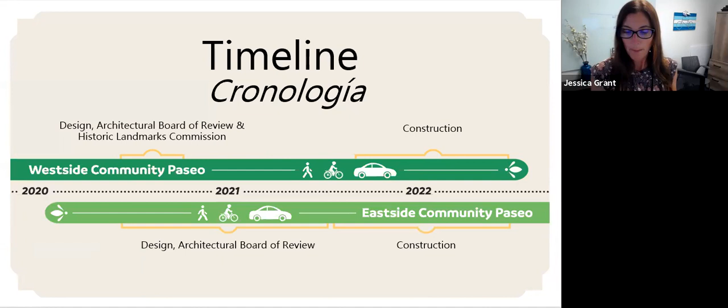Now let's begin at the intersection of Gillespie and Mission. This intersection is the main intersection to get to La Cumbre Junior High and Santa Barbara Community Academy. This intersection is currently at a skew and is not stop controlled along Mission, for pedestrians.

I walked this intersection with a junior high age Girl Scout troop, and one of the girls said this is by far the most difficult intersection during the school commute hours.

In response to the community, this intersection will have an all-way stop. We will also be able to shorten the crossing distance for pedestrians, limiting the time and the right-of-way needed for students and their families. With the intersection configuration, we are also able to better align the street and have much better sight lines. If you are traveling eastbound on Mission, you will not be able to cut through on southbound Gillespie, so Gillespie can be maintained as a slow street. There will be 2 parking spaces removed at Gillespie with this intersection improvement.

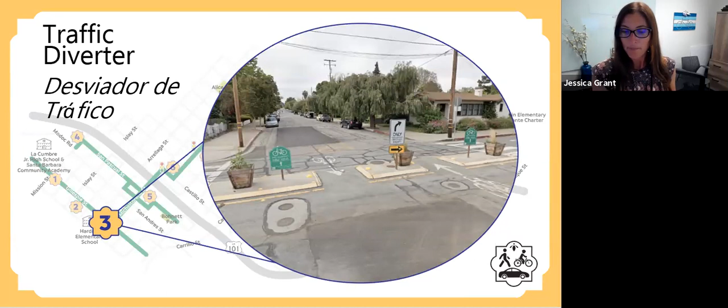There will be a traffic diverter, and this is an image of a traffic diverter in another community. The proposed diverter will have 8-inch curbs and look similar to the one in the photo, with the exception that brick is proposed within the curbs instead of concrete.

Drivers on Gillespie will now only be able to make right turns, to help slow the neighborhood route and limit the amount of vehicles on Gillespie.

In summary, the Gillespie corridor will have enhanced intersections, raised crossings, and traffic diverter features, making it attractive for walking, biking, and driving. Also note that all stop signs will be removed from Gillespie and changed to the perpendicular streets along the whole stretch of the Gillespie corridor. Again, this is to favor the movement of bicyclists.

Also note, we have received some questions on Gillespie about whether there is parking removal. With the exception of the 2 spaces that need to be removed at the Gillespie-Mission intersection, there is no additional parking removed. Please remember to use the chat function if you have any questions so far with what we just covered on Gillespie Street.

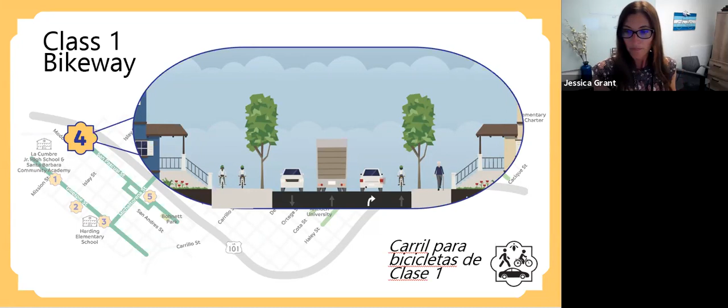Cyclists using this off-street path but wanting to continue on the street southeast of the Mission San Pascual intersection into downtown can hop right onto the on-street bike lane after this connection piece. For cyclists continuing on San Pascual Street, they will exit just before the driveway of Mission Liquor. We anticipate there will be 2 parking spaces removed right at this driveway location.

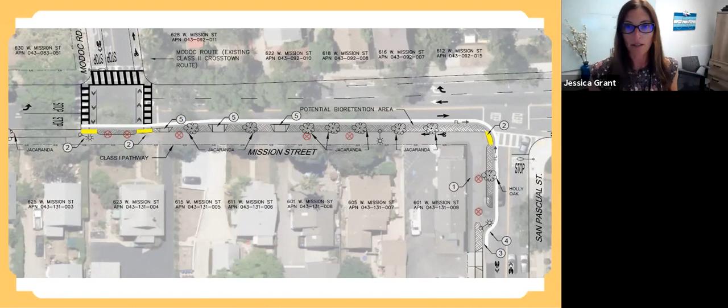So now we're on the San Pascual route. With the exception of one all-way stop controlled intersection at San Pascual and Islay, all stop signs are already on the perpendicular streets to favor the cyclists. Besides being a neighborhood route, we have heard from the community that this route will be very popular for bike commuters. At the end of our presentation, feel free to use the chat function, we will want some resident feedback on whether you think there are additional treatments you may want along this route with respect to slowing the street down.

Now we're at the final piece of the route that we are highlighting tonight. Both of the neighborhood routes connect to Micheltorena Street, and Micheltorena Street is one of the main streets connecting the west side to downtown. The community has wanted a strong bike route along Micheltorena Street over the Micheltorena Bridge into downtown, because this route does not involve navigating freeway on and off ramps like Mission and Carrillo Streets. Despite Micheltorena not having freeway on and off ramps, the street is still very busy for drivers, walkers, and cyclists.

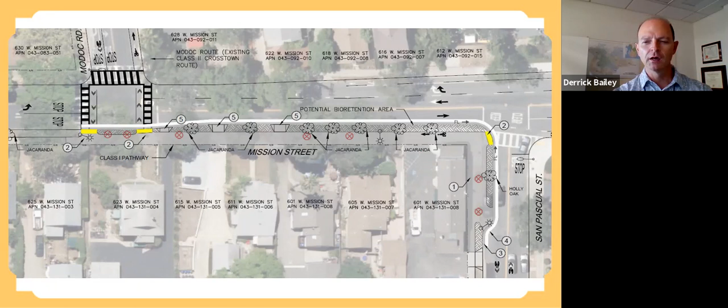We're not quite sure if there will be delineators on Micheltorena or not, and we hope they'll be attractive, not the white posts used on Cota Street. For everyone not familiar, Cota Street coming from the east side has a bike lane against the curb, then a painted buffer about 2 or 3 feet wide, and a vertical plastic delineator separating traffic from the bike lane.

We've received a lot of good feedback from cyclists that they feel safer in that bike lane and appreciate the separation. It takes up space though, to create that buffer for the vertical delineator. That's why we're leaning towards the raised bike lane concept instead of a buffer, but we'd appreciate your feedback. If that would make you as a cyclist feel safer, please let us know.

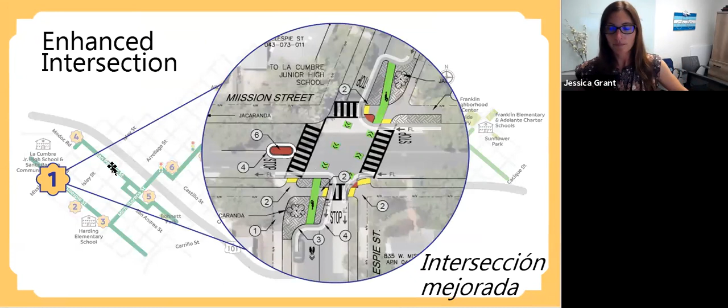Can you go to the Mission Gillespie intersection, Jessica? Sure. Can you hover your cursor over the northeast corner? Yeah, right in there. Currently the bus line comes down Gillespie and turns left from Gillespie onto Mission to go back towards the freeway. You'll notice the radius on that corner is a little bigger than the corner right across the street, and that's to accommodate those bus movements.

We also have to design this intersection so fire trucks can get through in case of an emergency, just to bring that up as well. But yes, no changes to that bus line.

Next question: will Dutton still be a two-way street? Yes, Dutton will still be a two-way street, but as we talked about, if you're coming down Dutton from Arrellaga towards Micheltorena, you'll only be able to turn right when you get to Micheltorena. We think a lot of drivers will choose to use Arrellaga instead, so even though Dutton remains a two-way street, it should be less heavily trafficked than it is right now.

Thank you. Okay, next question: will the bus on Gillespie between Portesuello and Mission be affected?

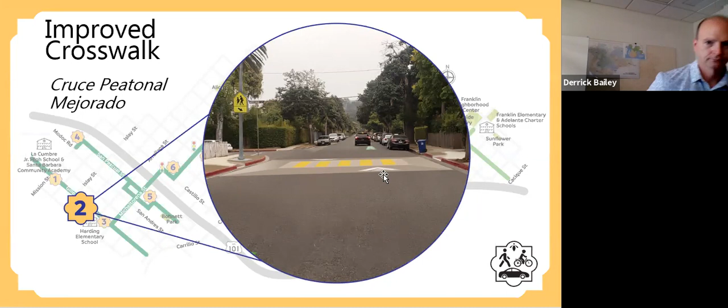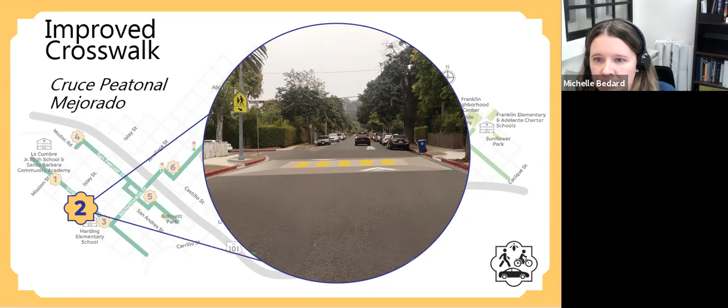Question about bike lanes on Micheltorena. Will there be a separate bike lane on Micheltorena between San Andres and Gillespie? There's not. The bike lane, as far as this project goes, will end at San Andres Street, and there's currently no plans to extend it further west. So once cyclists get west of San Andres Street, they'd be sharing the lane with vehicle traffic, and there would be no changes whatsoever to parking.

Just trying to see if I can find questions in the similar neighborhood area here. There's concern for speeds of vehicle travel on San Andres. Are any improvements planned for San Andres? Cars drive really fast on the street, and there are several close calls with bikes and pedestrians. That's a really great question. So two things: we're hoping that once we get really good bike infrastructure in place on these parallel streets to San Andres, cyclists will generally find those streets more attractive to use rather than San Andres, but some cyclists will continue to use it. We fully acknowledge that. As for pedestrians, there are plans for San Andres, yes.

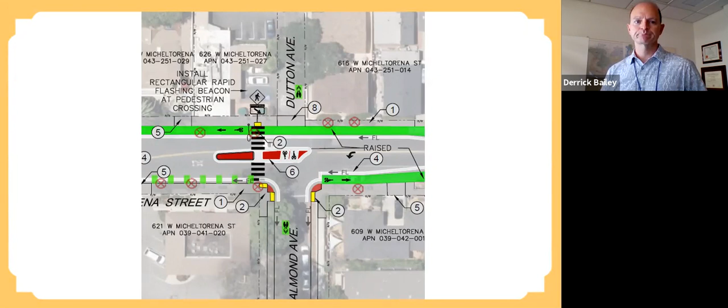Thank you, Derrick. Next question: will drivers on Gillespie be able to drive straight on Gillespie Street at Micheltorena?

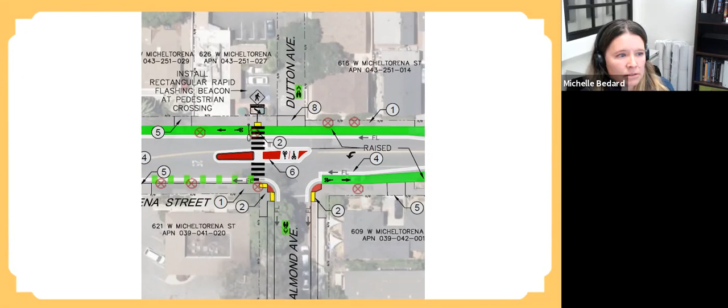No. Can you go to that graphic, Jessica? Yes, I'm bringing it up.

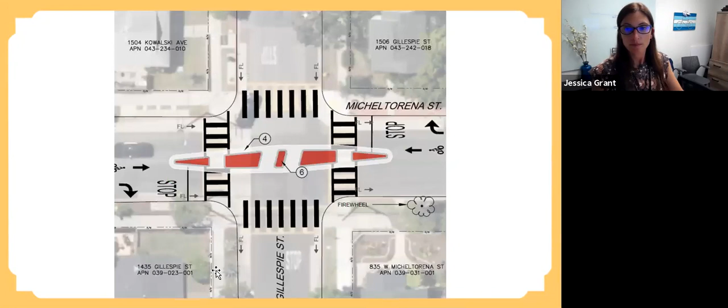Going back to the discussion about stop signs and trying to create an efficient route for cyclists so they can ride from one end of the corridor to the other without having to stop — that has the potential to attract drivers to Gillespie Street as well. Drivers, just like cyclists, are going to seek out the most efficient street they can use, and if there's a street available without any stops, it's going to seem really attractive. The two biggest sources of traffic on Gillespie Street are from Mission and from Micheltorena, turning on and off those streets. So in order to cut down on that traffic, so we don't end up with more traffic using the street when the stop signs are changed, one of the treatments to be used at Gillespie Street is this: traffic approaching Micheltorena will be forced to turn right. Those little gaps in the center will be large enough for cyclists to slip through, and there will also be a treatment so that if fire trucks need to get through, they'll be able to make an adjustment and pass. But regular vehicular traffic is going to be forced to turn right.

Thank you, Derrick. We have a question about whether the crosstown shuttle route that goes along Gillespie will be affected.

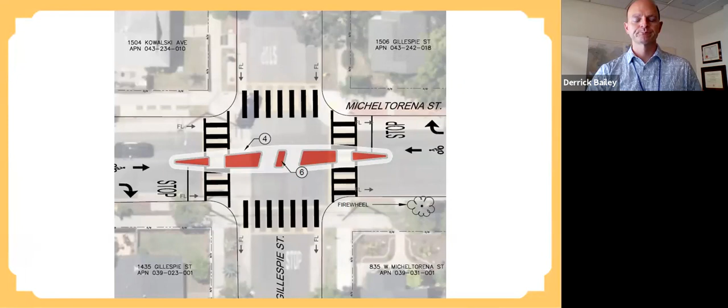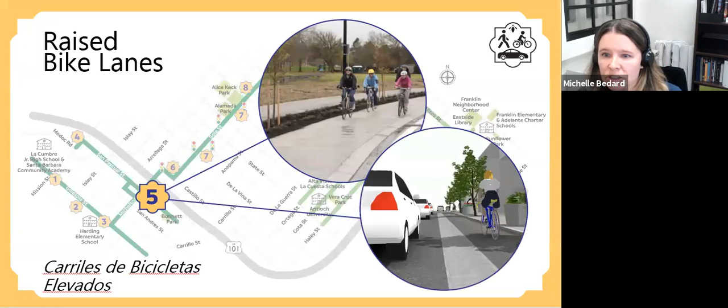Another question regarding bike lanes and bus stops on Micheltorena Street: how do bus stops and raised bike lanes interact?

Buses can pull onto raised bike lanes. Imagine a 6-inch curb like you normally see at the side of the street — the raised bike lane will be about 3 inches, and at its edge there'll be a taper down into the street. Buses can pull over into that area to make their stops, but the change in elevation should be enough to keep most vehicles out of there.

Following up, another question about bike lanes on Micheltorena Street: will there be separate bike lanes between San Andres and Gillespie? No, that's not planned as part of this project.

We are trying to create strong parallel routes so that cyclists wanting to get to the crosstown route would go up Dutton towards San Pascual and use that path on Mission. There will be some cyclists who want to get over to Gillespie, but the parking removal associated with that would be pretty significant, so as part of this project it just didn't seem feasible. For the time being, there will be sharrows in the street to share lane markings and help cyclists get from San Andres Street over to Gillespie.

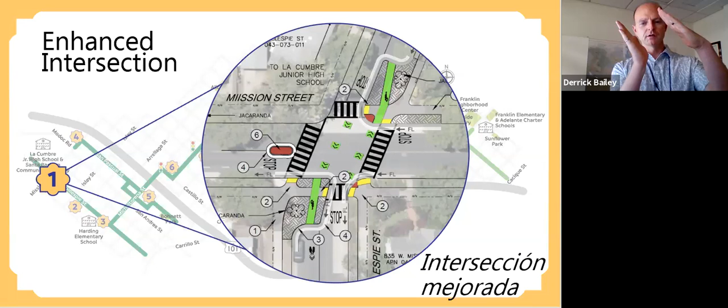No. If you can bring that graphic up again, Jessica, maybe we can spend a minute and talk about what's going on. As Jessica mentioned in her presentation, this intersection has quite a significant skew to it, meaning Gillespie really angles as it goes across the intersection, and the corners don't line up very well.

One of the things we've heard is that this is an important walking route to get to La Cumbre Junior High. Through our traffic studies, we also found this is a major source of traffic on Gillespie Street. So as a way to control the amount of traffic entering and using Gillespie Street, this location makes a lot of sense for turn restrictions. There'll be no more turns from Mission Street in either direction onto Gillespie Street, and with these diverters, these landscaped diverters, there'll be new trees in them.

There's also going to be the opportunity to really line up those crosswalks a lot better than we'd be able to today, just because there is such a significant skew in the intersection. You'll also notice there's going to be a small island on the west leg of the intersection. That's that red. If you can just hover, there it is.

We're calling those stop islands. One of the concerns with installing an all-way stop at an intersection that has really light volumes on the side street is stop sign compliance. What I mean is drivers tend to learn over time what to expect at certain intersections. If stop signs were put up at this intersection and the driver uses it over and over, what they'll find out over time is that there's usually not going to be traffic on the side street to contend with.

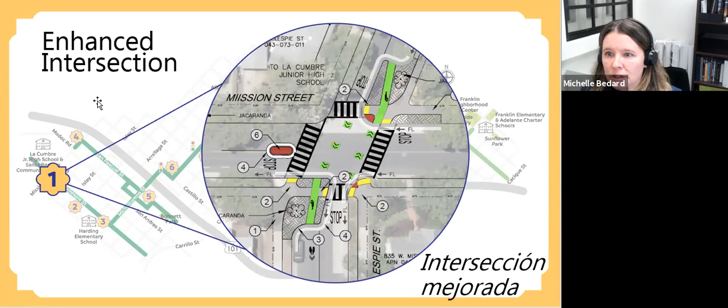Yes, there'll likely be two removed. There'll be one there where Jessica's hovering her cursor, where that landscaped diverter is, and then one catty corner across the intersection, right there.

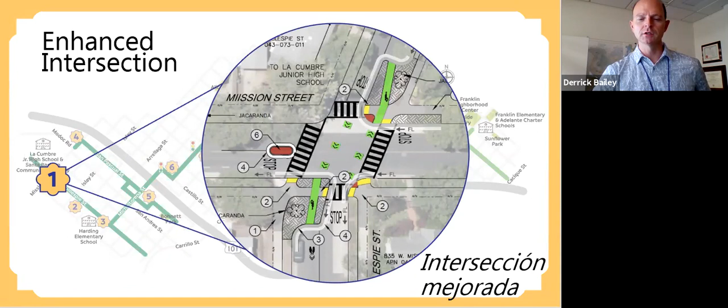Somebody asked about what devices are going to be on Gillespie Street between the raised crosswalk at the raised school crosswalk at Valerio up to Mission. Currently, there aren't any plans to add anything to that section of Gillespie Street.

That's those three blocks between Valerio and Mission Street. We'd really love to hear from everybody listening, either live or on the recording, if you think we need to do any more there. I know we've had complaints in the past about speeding on Gillespie Street. We want to be sensitive to everybody that lives on the street though, and not overdo the traffic calming with the two raised crosswalks that are going to be next to the school. But if the community thinks there needs to be more done, please let us know.

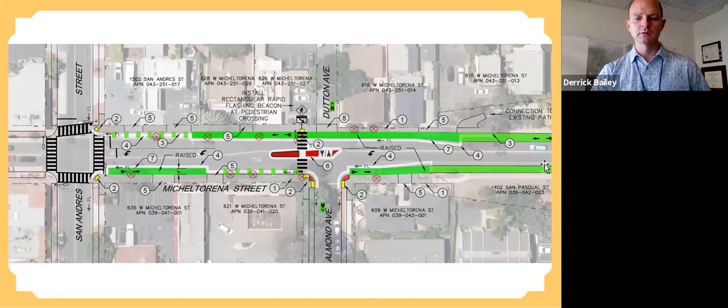Some of those are off the map as you start to climb up the hill. Right.